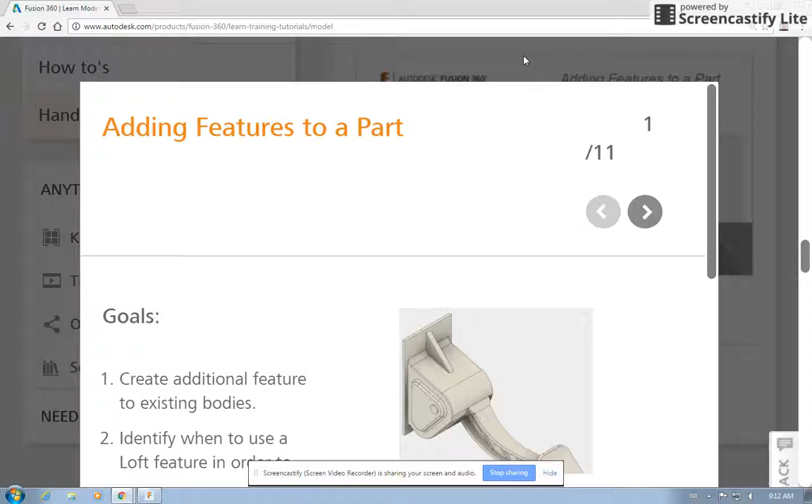So we've got our second modeling exercise, same website as always, autodesk.com, products, Fusion 360, learning and training tutorials. I got that zoomed in because it made it easier for me to look at, and 100% might make it a little easier to notice at first.

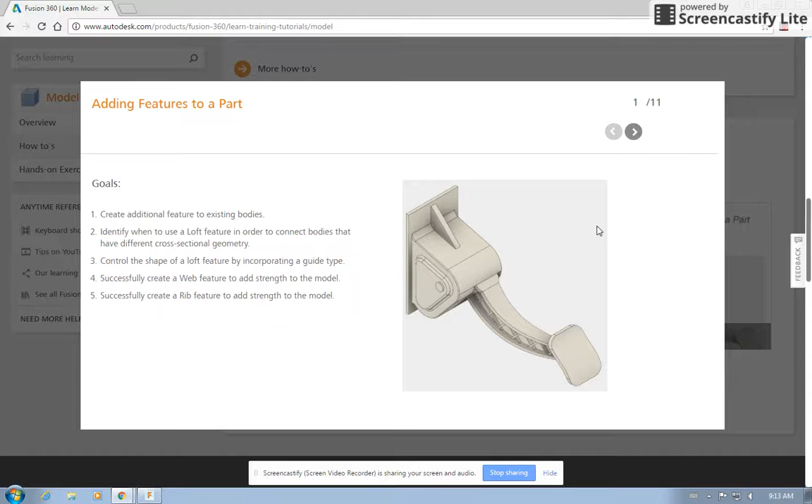So this is the last one we did, using lofts and extrudes, or lofts and revolves, to build a musical instrument. Now we're adding features, and this is a gas pedal assembly. This is a pretty impressive drawing. What's going to get covered is creating additional features to existing bodies, identifying when to use a loft feature in order to connect bodies that have different cross-section geometry, and a few more skill setups.

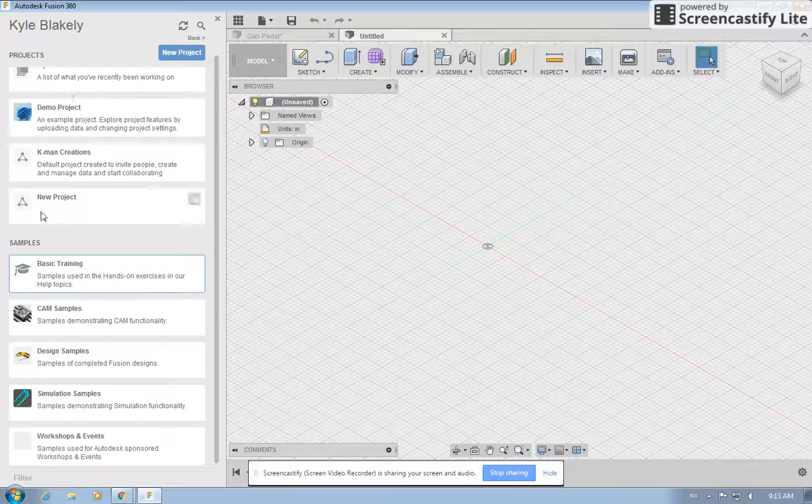So we're going to open up gaspedal.zip. You open up a new Fusion document. I've already completed it here, and the beauty of these assignments is that when you click on Fusion and log in, you click on the Files section, under Basic Training, Modeling, there's all these different assignments you can do. So right now we're going to work on the gas pedal, so we'll double click.

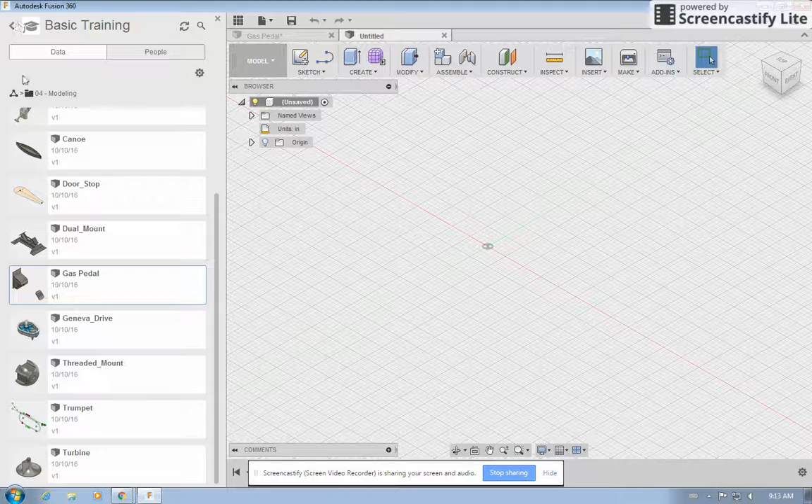And it opens up, and it looks like I may have been in the wrong document. Let's try that again. Gas pedal. No, I have to close it. So it does not let me. Don't save, it's a read-only document anyway, so you shouldn't be permanently editing them.

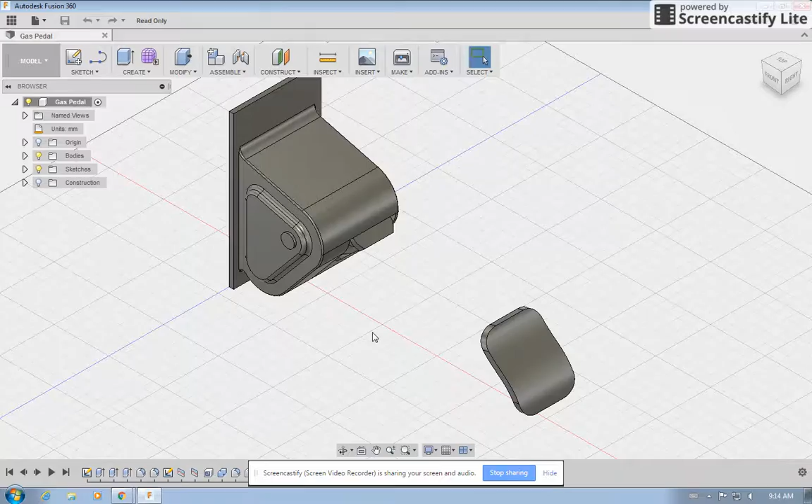There we go, so this is what it looks like at first. You get a bit more of a feel for what we're working with. So we've got what would be mounted to the firewall of the car, and the actual pedal that you press.

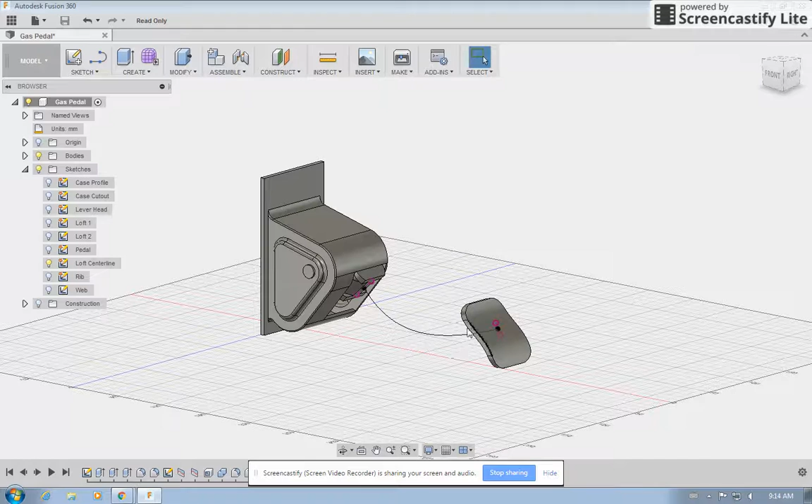Going back over to our instructions, the first thing we're going to do is work on a loft. So we have to expand our sketches menu and then turn on our loft centerline. So under sketches, loft centerline, and we can see a nice line that will connect the two.

Past that, we have to click on the I that's connected to the body, which would be attached to the firewall, and then click on the I that's on the back side of the pedal, and then we're going to end up with a nice loft.

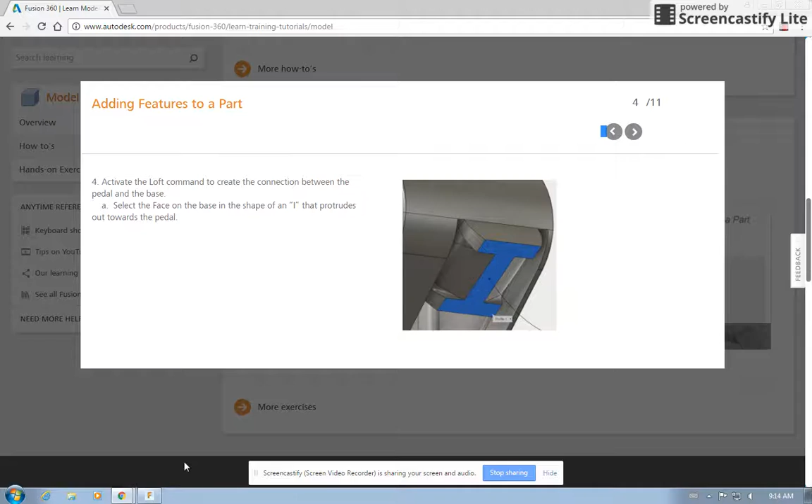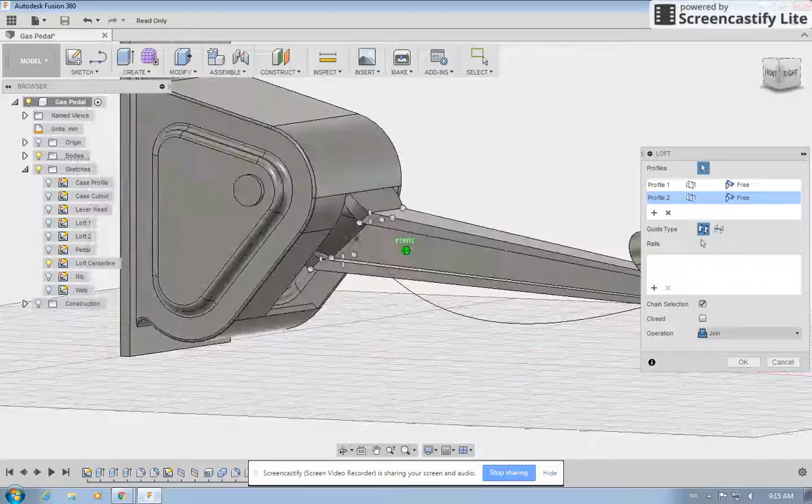So back into Fusion, zoom in a bit. Up here we've got Create Loft. First thing we do is click on the I face, rotate the model, click on the other I face, and you can see that it went straight across. It did not use our arc that we turned on, our loft centerline.

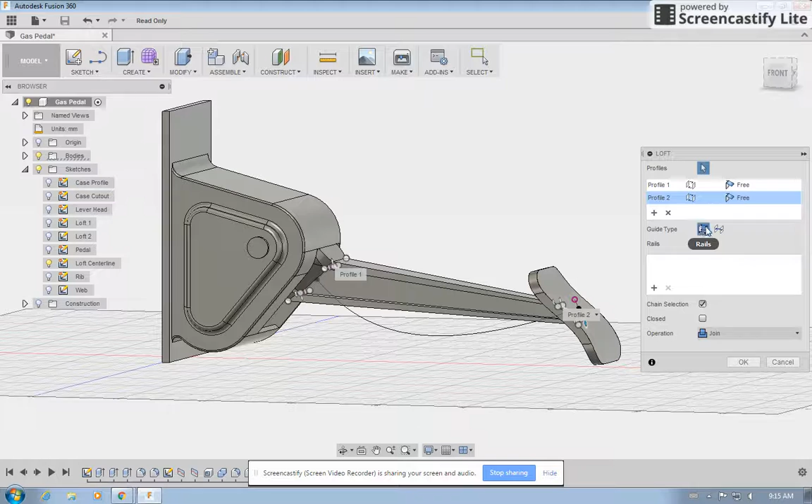So if you hop back over to the instructions, you'll see that it tells you to select the loft centerline from the centerline options. So right here you've got rails, which just goes from one down to the other, and then a loft centerline, which allows you to choose this curve. Now it centers it along that path, and you can click OK.

So step one is done. Looks pretty good, looks like a gas pedal assembly.

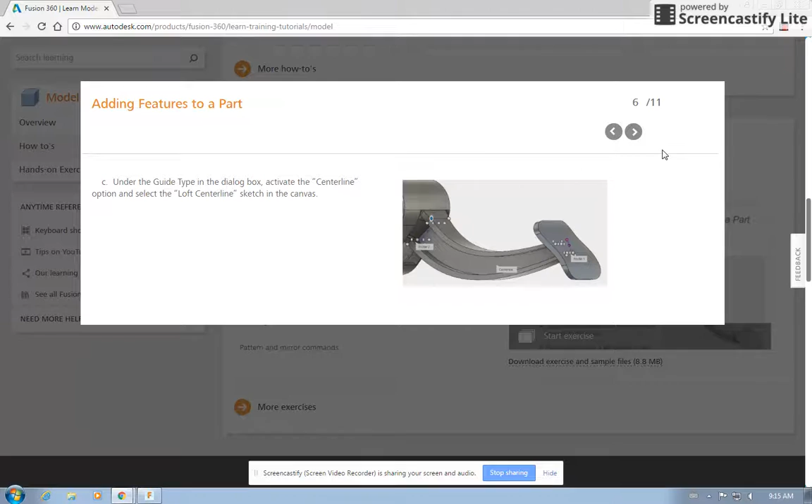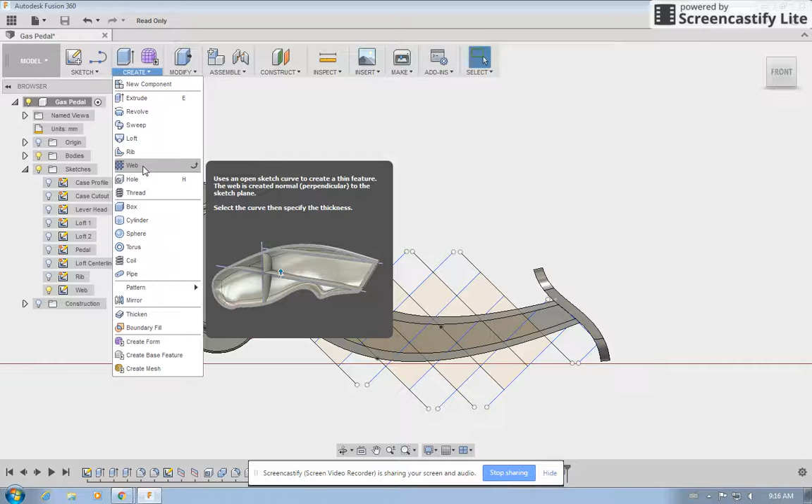Back over, now we have to turn on our web sketch. So right here we've got a web sketch, and what we're going to end up doing is clicking on the 11 lines that pass through this middle section. What the web feature does, if you rest your mouse over it, is it creates cross sections from lines and adds them to a solid, so that you don't have to model each individual piece. You can just sketch lines and build it off of that.

So we click on web, and then up here we're now going to get to select, and it should allow you to select every line at a time, but for me it makes me do it one line at a time. So if I click on this, it automatically defaults to 2 millimeters, which is what we're supposed to do in the instructions. I have to keep going through because it will not let me click on more than one line at a time, but at least the sketch stays up. There's no shortcut for web, so you have to just be patient.

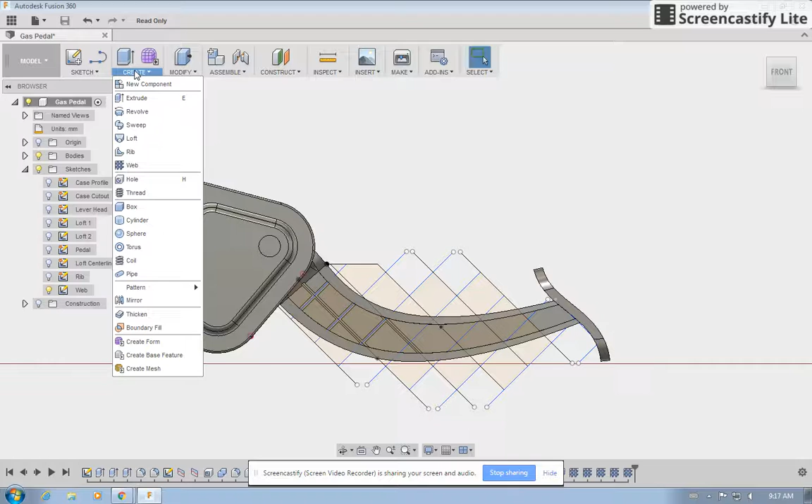Click through, you still end up with the right result. It just, instead of clicking on all 11 lines and then selecting it, you have to do them one at a time. I don't know if there's a step I've missed or if this is just a glitch, because you should be able to select all the lines ahead of time.

What's nice is it maintains within the boundary, and it keeps the webbing inside the pedal. It's a pretty impressive feature. I missed one line there, and they're all 2mm webs that we're adding. And we've got a few more.

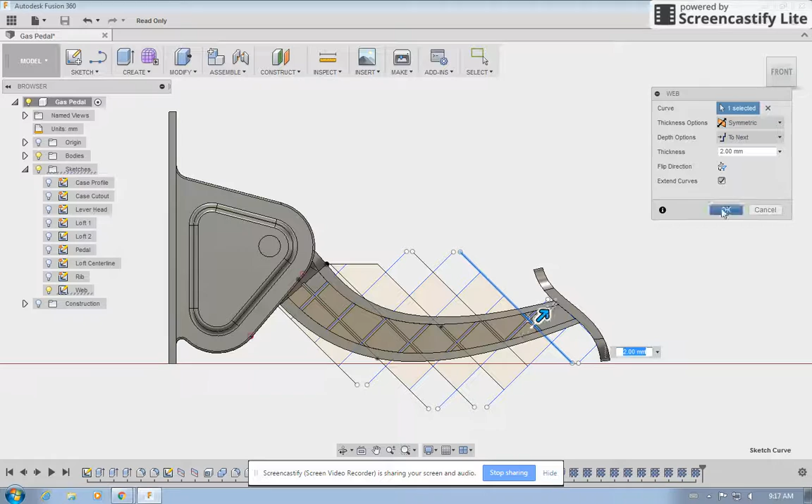This should all just be one tab, but you can see down in the design history. Move that out of the way. You can see down in the design history that I've added 1, 2, 3, 4, 5, 6, 7, 8, 9, 10, 11 webs. So that's all done.

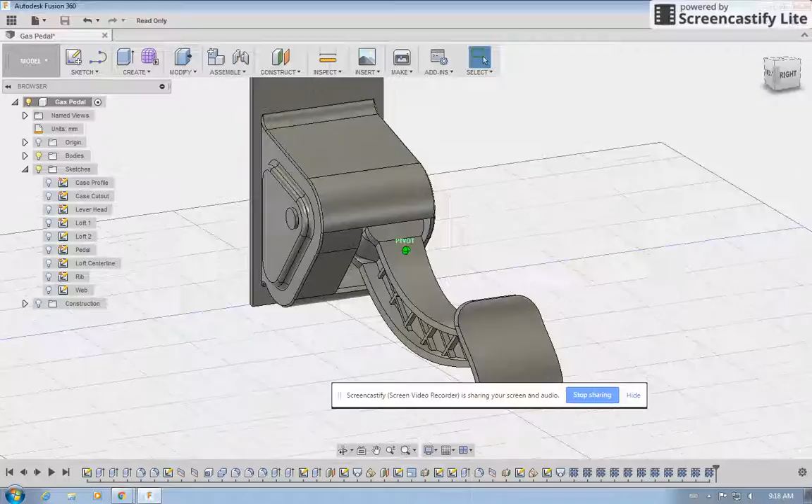And we can hide that sketch now. And if you rotate, you can see what I mean, the material added to the inside of the pedal in order to make it stronger.

So next past that is we have, see, you should be able to select all 11. It was only letting me do one at a time. So it's a little bit inconvenient, but it still gives you the same final result.

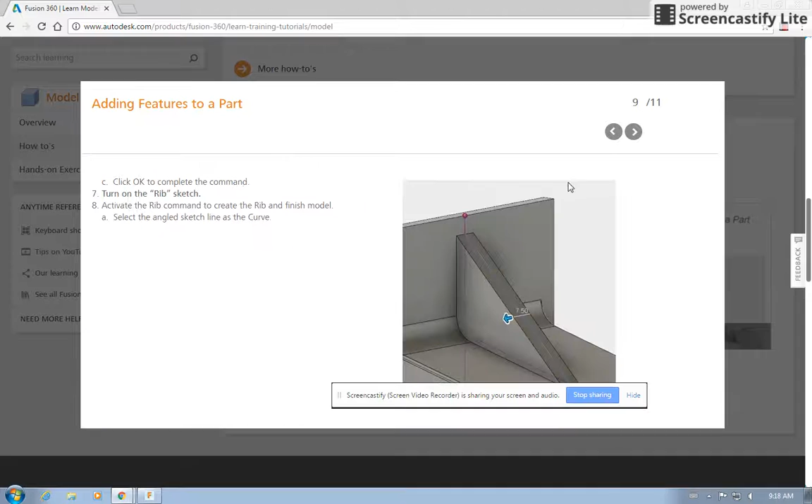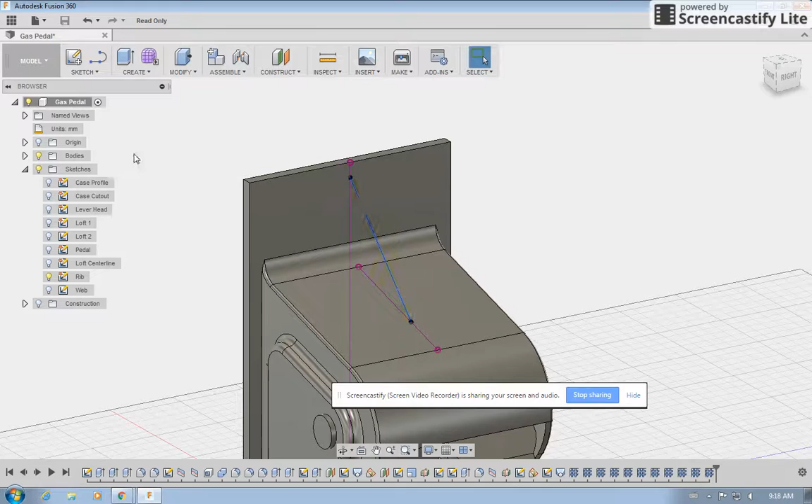Now the next is this rib feature that has to get added at the top of the pedal assembly. So you can click on right and rotate it. Now we have to activate our rib sketch, which is this line here. So create rib and then select a curve, which is right there, and 7.5mm is what it should be set to, and symmetric, so it goes both directions, it stays centered. There we go.

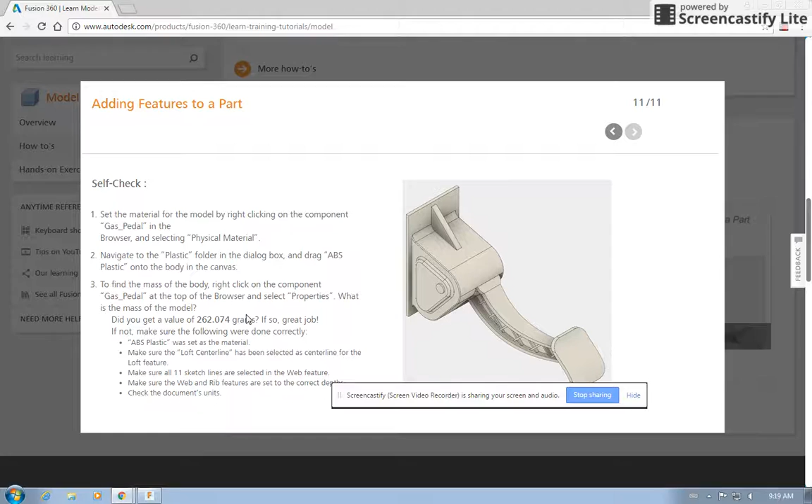Now it's gonna tell us what we just talked about, and now down here, to see if we've got this right, we want to check and see if we have to set our physical material to ABS plastic. Where does it say that? Navigate to plastic, ABS plastic, and we should have a 262.074 gram solid model.

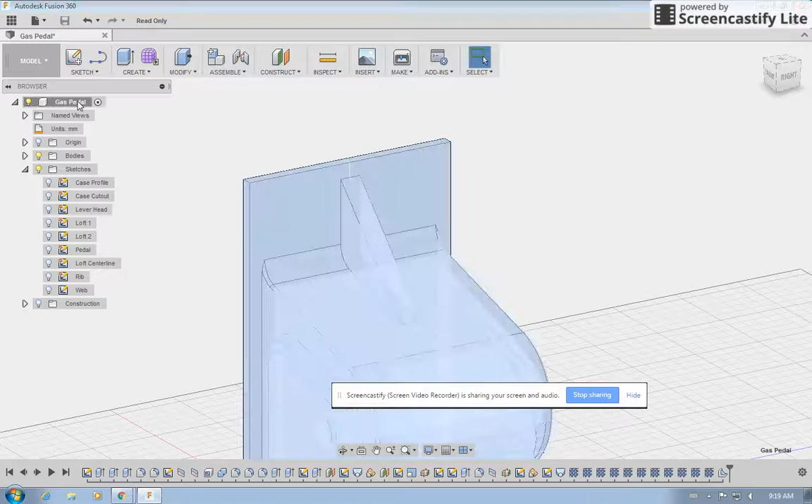So we go up to the top, gas pedal, so it incorporates the entire model, physical materials. Move that out of the way. Plastic drop down, ABS plastic, drag it over onto the model. You can close this and you can see the color changes.

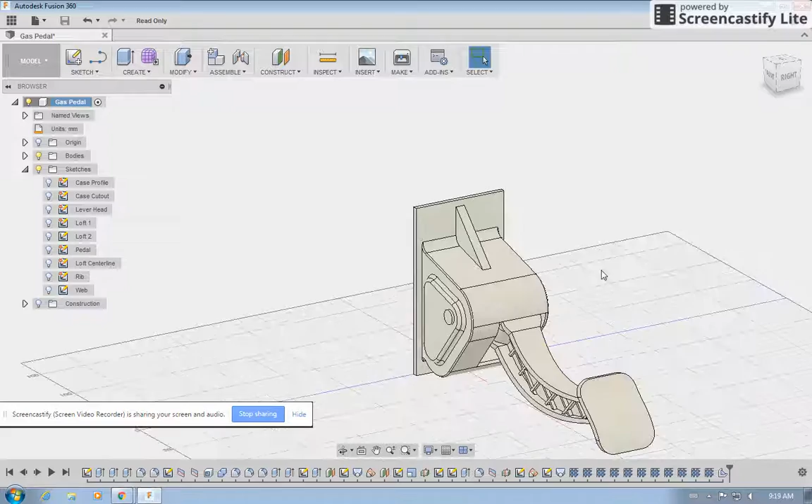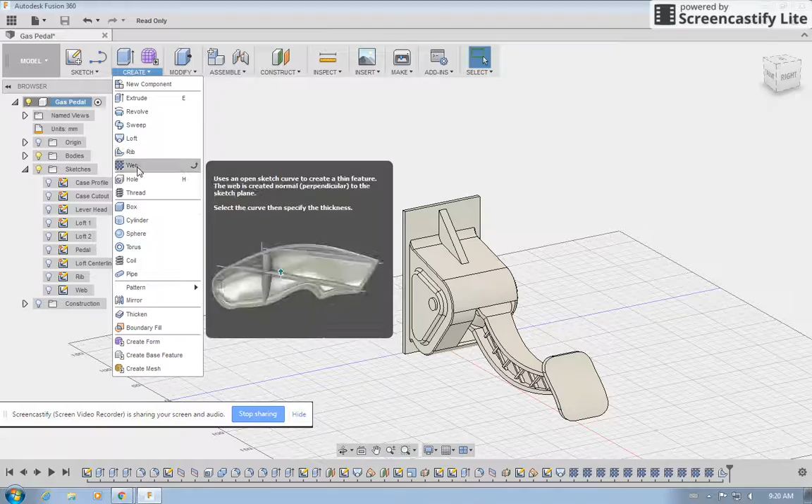Now if you right click on the model and you go properties, we'll see that its mass is 262.074 grams. So we have got this correct. So follow along, give that a try. You're going to end up learning about using the Loft, rib, and web command, which are all impressive ways to model within Fusion 360.